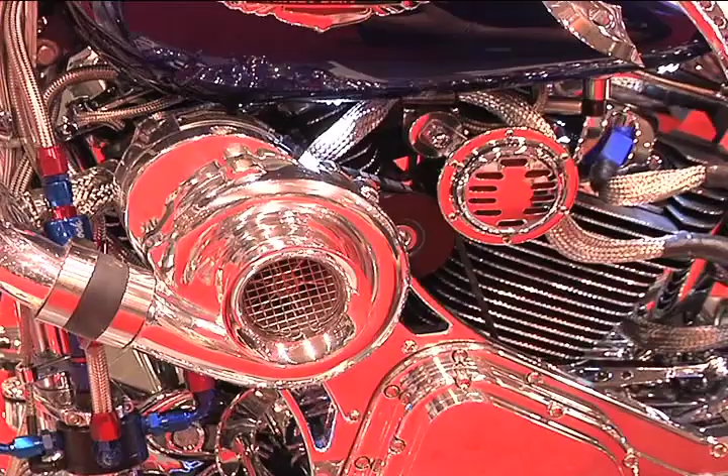So first off, I'd like to talk about the ProCharger with the Gates wet belt that they have inside. What they do is they have a modified cog here, and then there's a Gates wet belt that goes all the way around, transfers to the outer belt out here, which transfers to the transmission.

On this particular build, what we did was we put a 2.55 pulley on there to make the impeller spin just a little bit faster, and then there's a more aggressive impeller in there that they changed, and I think what they do is they arbitrarily give you that impeller with the ProCharger.

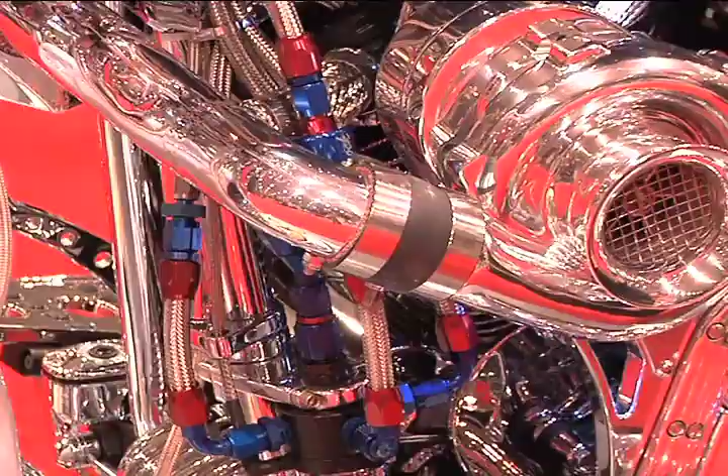Over here is a pressure release valve. So the blower is always on, but when you're under normal driving conditions and it feels vacuum, the pressure relief valve is open and it lets the air bypass out, or when you let go of your throttle, it lets all the air bypass out so it doesn't collect in your manifold.

And then what we did for this particular build, the pump that came with the bike was not flowing to meet the requirements for the modifications that we made for the bike. And if you have a ProCharger out there and you're starving for fuel a little bit, you may want to consider making what's called an FMU. An FMU is a fuel management unit.

And what we've done here is we bought this Mallory fuel regulator, and on this side over here there's a boost vacuum hose that's hooked up to the regulator. And all I did was I simply plumbed it right up into the crossover that Harley has on the tank, so I didn't have to modify anything on the tank.

The 100 psi pump is regulated down to 65 psi at normal operating conditions, and then as soon as it feels boost, pound for pound, it'll close off the crossover and force more fuel to the Magneti Marelli injectors that I have. I think I have 8.9 Magneti Marelli injectors that also come with the B1 tuner kit.

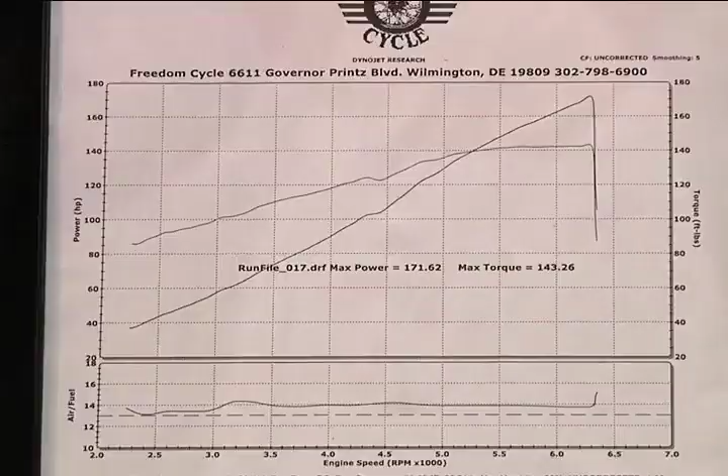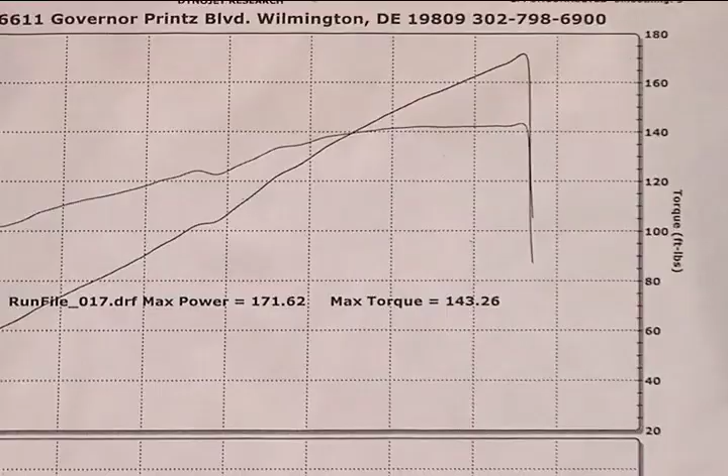What I have here is the dyno run that was taken at Freedom Cycle with this current build, and the first thing you can see is this straight line that goes all the way up here. That's your power at the rear wheel. So I've got 171.62 at the rear wheel, and then over here's the torque line. And the funny thing about the torque line is, as you can see, at about 5300 or 5400 RPM, it kind of maxes out. You know what that tells you?

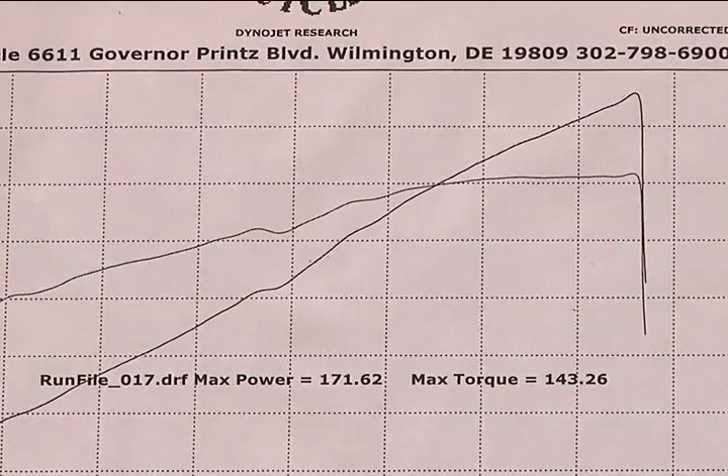That tells you that you don't need to rev your motor up real high. You can shift at 5500 RPM and you're at your max torque. So I have my shift light set at 5500 RPM so I can save my motor, because I learned the hard way that over revving a Harley Davidson is not the thing you want to do. So I just wanted to show you this dyno run here, and just an extreme amount of power. If I were to let it run out to 7,000 RPM, I probably would have got 200 horse out of the motor.